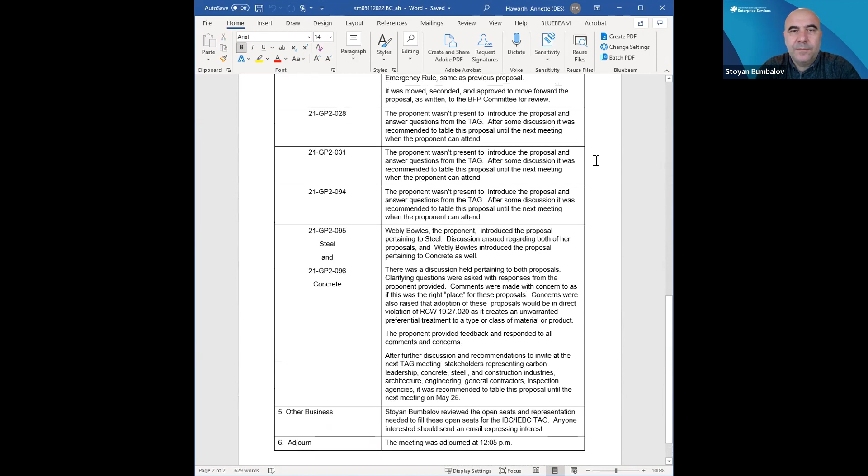I'll make a motion to approve the May 11th meeting minutes. Thank you, Sue. I'll second that. Thank you, Roger.

Okay, any discussion or edits here? All those in favor signify by saying aye. Aye. Aye. Aye. Opposed, nay? Or abstentions? Okay, May 25th meeting minutes approved.

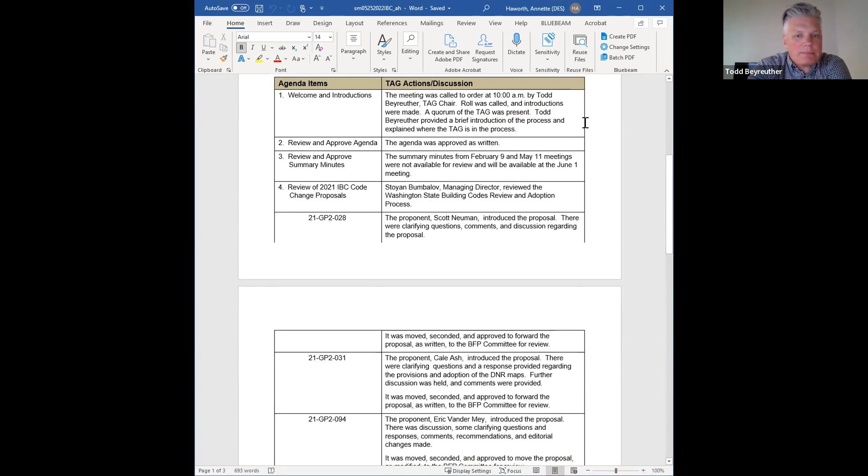I'm sorry, did I get that incorrect? We approved the 25th. Now we're on to the June. Oh, okay, I'm sorry. We approved the 11th, so this is the last one, May 25th. Thank you. Now we're on 25th. Thank you.

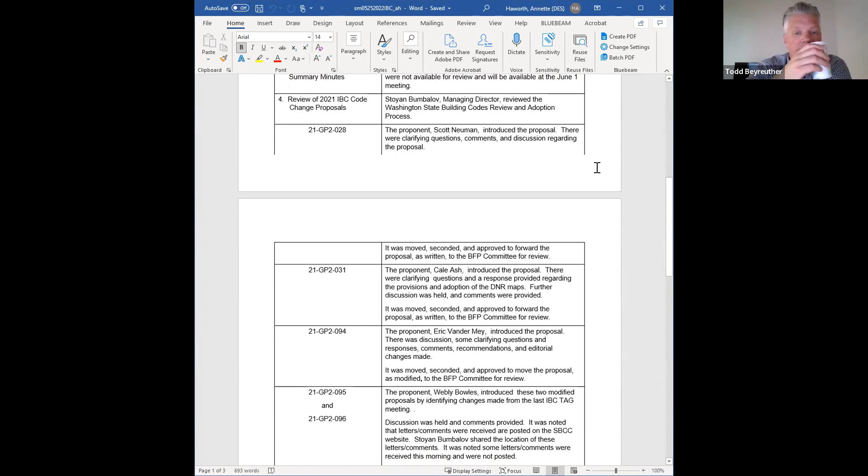Okay, I'll make a motion to approve those minutes. Thank you, Roger. I'll second. Thank you, Sue. Any discussion or edits?

All those in favor signify by saying aye. Oh, I'm sorry, Todd. Go ahead, please. I have a comment on, towards the bottom of the summary minutes there, I'm just trying to understand the impact here.

On the last proposal, it said the motion was made to table further discussion of these two proposals until legal guidance is obtained. I'm just trying to understand what the impact of that is, because I remember, I think Andrea made that motion. I'm not sure if it was seconded, but I'm just trying to understand the impact of that.

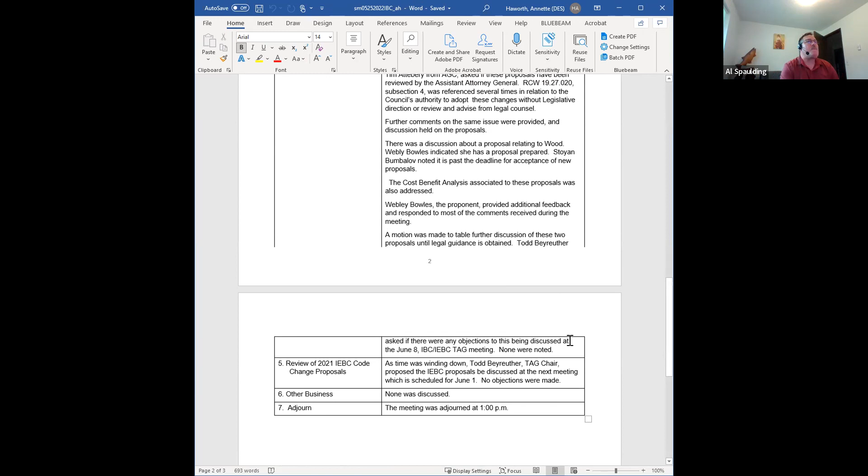I requested our Assistant Attorney General to evaluate the section that Andrea was, well, there were a few comments actually regarding this section, 19.27.020, I think it was.

Sub 4, right. Yes. So I assume we will have a little information for the next time. But again, keep in mind that the advice the Assistant Attorney General can give us, it's not 'go ahead, do it' or 'don't do it.' It's just an opinion that is not based on any case laws or anything. So I will have something for the next time. No further comment. Thank you.

Al, it's a good point. I don't know if you were trying to make a point that that wasn't the only reason we tabled it. Is that correct? Well, yeah, I understand the conversation was continuing, but I'm just wanting to make sure that this note almost infers it was tabled because we were awaiting legal advice potentially, and I don't want the discussion to be held up.

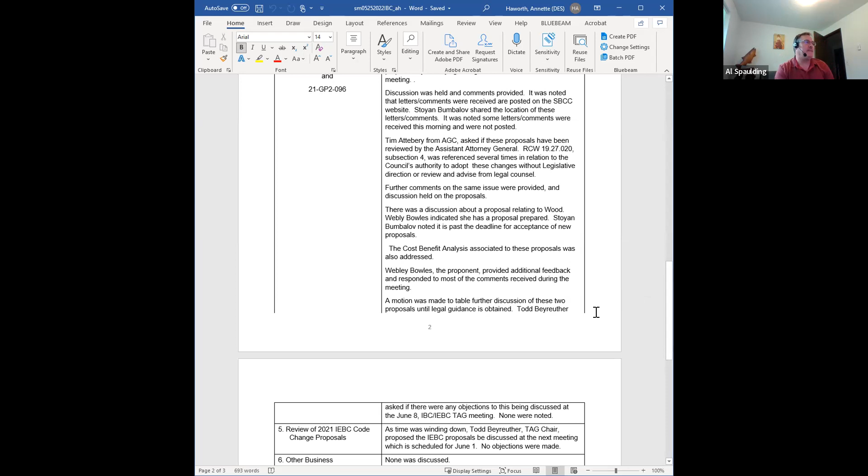Based on whether or not SBCC gets legal advice or not. I don't know that the motion was seconded and approved by the tag to hold it up until legal advice was obtained. So that's what I was trying to point out, that I don't want that summary note to hold up the tag's ability to move forward.

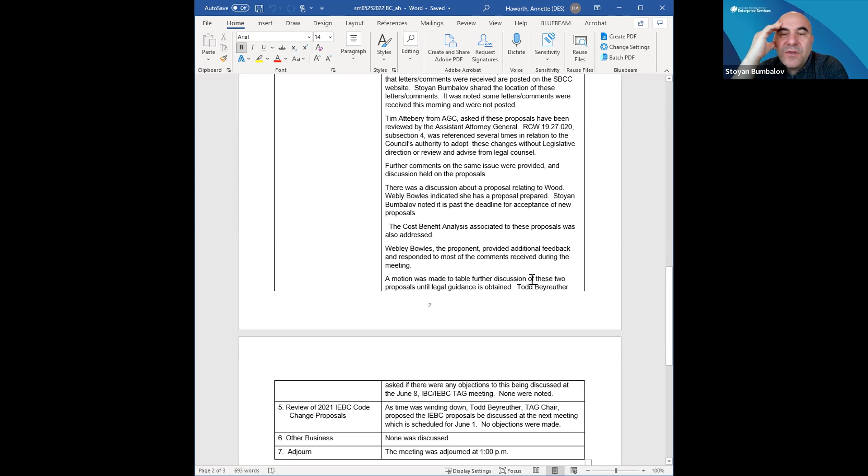Can we modify the minutes to read the motion was made to table further discussion for the meeting, whatever the date was? Yeah, because really in my memory it was just a continuance. There were multiple reasons why we wanted to continue. Yeah, we ran out of time, so we wanted to continue the discussion. I appreciate that, thank you.

Yeah, no, good catch. Sorry, Al, I think I didn't understand the question at the beginning. I cut you off actually, so I apologize for that.

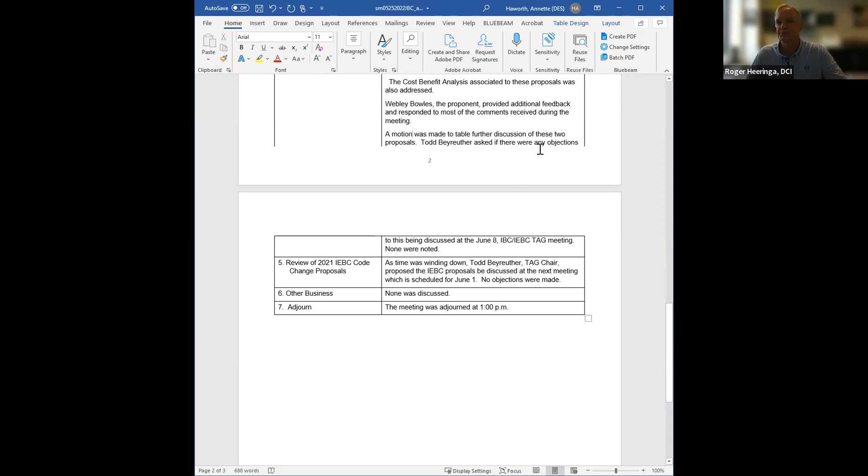So I will amend my motion to approve the minutes as modified. Thank you. And then Sue, did you have the second? I'll second that. Okay, thank you. Now, thank you, Al. Any other further proposed changes?

All those in favor signify by saying aye. Aye. Aye. Aye. Aye. Any opposed, nay? Or abstentions? Okay, thank you. May 25th minutes approved.

That was it, right? So with that, we can move into agenda item 4, which is to actually review the 2021 IEBC code change proposals. As we get into this, my memory is we have how many, Stoyan? Probably 13, 14? We have 1, 2, 3, 4, 5, 6, 7, 8, 9, 10, 11. Okay, 11 proposals. So obviously we're going to use Robert's rules here.

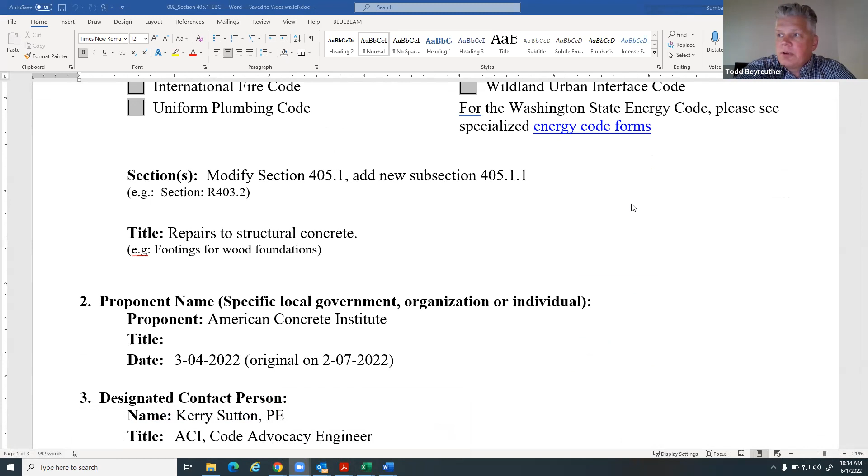This is a workshop, so it's not formal testimony, though often it takes that format. Our goal here is to make sure everyone who wants to speak is heard. We will open each time with the proponent if available and would like to speak to their proposal. With Robert's rules and via Zoom, let's use the raise hand feature, please, and then I will acknowledge you.

Yes, Kerry. No, just testing it out. Oh, there we go. So I am the proponent and the... Oh, okay.

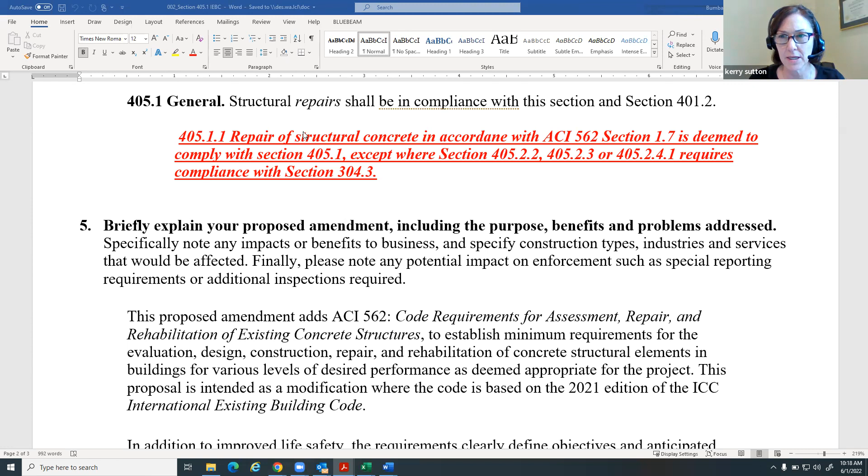What this does here is proposes modification of section 405.1 and adds new section 405.1.1, repairs to structural concrete, stating that repairs of structural concrete in accordance with ACI 562 are deemed to comply with the section. So I know there are a few others that might have a few comments on this. We have a couple of our supporters, Andy Taylor and Keith Kesner, that are online today as well.

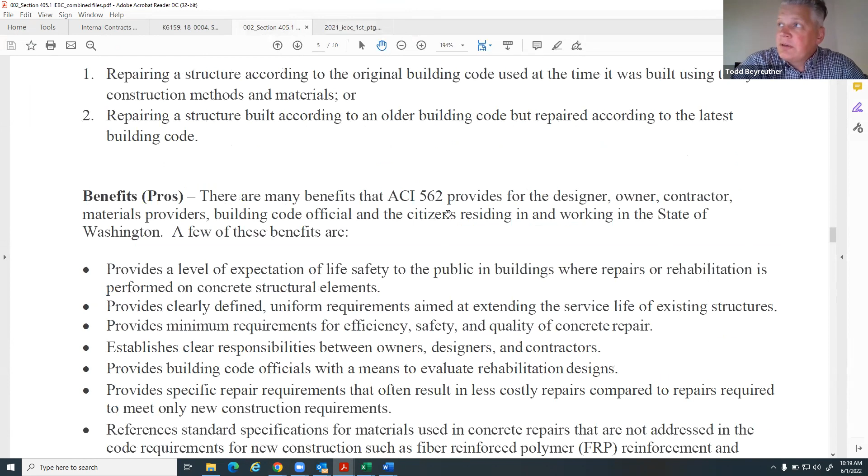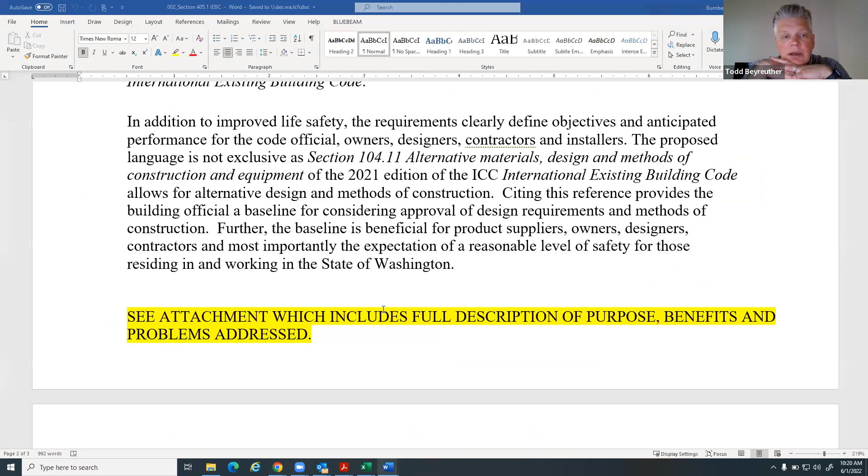Okay, thank you Kerry. And let's move into other proponents or other stakeholders that would like to speak on this. Maybe I should go a little deeper though, since I set all these amendments or proposals up. We do intend to take action today as the Technical Advisory Group. The Technical Advisory Group is a stakeholder group with advisory responsibilities to the council. The first step though is to move it into the BFP, Building, Fire, Plumbing Committee, which is made up of a subset of appointed council members. So typically in these groups, anyone can propose amendments, but we will take a vote on the action as the TAG members. And then typically, we can recommend as proposed, recommend as modified if we make changes, or perhaps not recommend or reject whatever language we want to use.

Okay, with that, would anyone else like to speak to this? Okay, this is John Sue. I got my hand up. John, I'm sorry. Yep, there it is. Welcome, John.

So I was on the structural committee at ICC, and one of the things that did come up was some of the language here, some improvements were suggested, and I sent that to Kerry the other day, yesterday actually, and would like to propose making a couple changes here, and I believe ACI is in support of them, and she's nodding, so thank you, Kerry.

Yes. Yeah, so part of it is there was some real heartburn with the committee and others in Rochester, the ICC hearings, about the 'deemed to comply' language. And there was some question about whether that overrides some other parts of the code and things like that. So what I'm suggesting is a couple things.

One, just editorially, the section needs a title. So I've suggested 'structural concrete repairs' for a title there for the section. I will say that ICC just had 'structural concrete,' I believe, but I thought 'repairs' was more specific here. So yeah, add the title there: structural concrete repairs. Thank you. And then, after the word concrete, repair structural concrete.

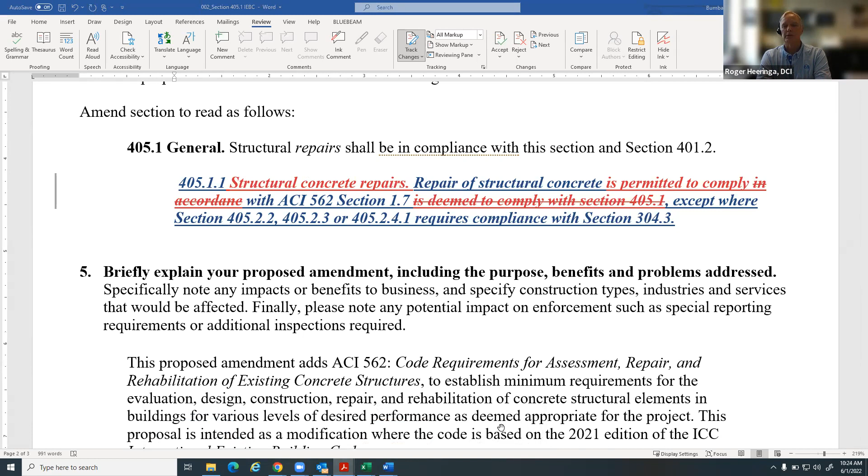But can either one of you inform me or describe what, no, I can't, what the exceptions are? So section 405.2.2, 405.2.3, or 405.2.4.1. Can you explain, I don't have the code here in front of me, can you explain what those exceptions are and why that's part of this?

Here is the 2021, okay. No, I believe it's actually the references. Well, okay, yeah, the idea is to take the seismic out of it. Basically, this does not apply to seismic repairs.

The FEMA ATC Seismic Code Support Committee, I gotta get that right, was very concerned about some of the provisions in here in ACI 562 and felt they were not appropriate for seismic repairs. So essentially, this says if you're doing any seismic repairs, this does not apply.

Okay, thank you. And that is clearly pointed out as well in section 1.7 of ACI 562. Okay, thank you.

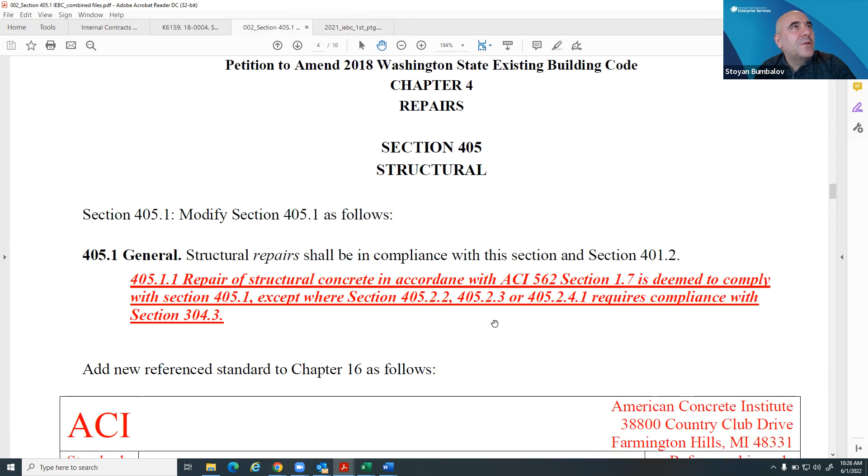Anyone else? And I have a question here. So there was an attachment that was submitted with this proposal. So here is the attachment, which says 2018. So I'm a little confused if this here is part of this proposal or not, because the proposal doesn't have the amendments to Chapter 16 of the Building Code.

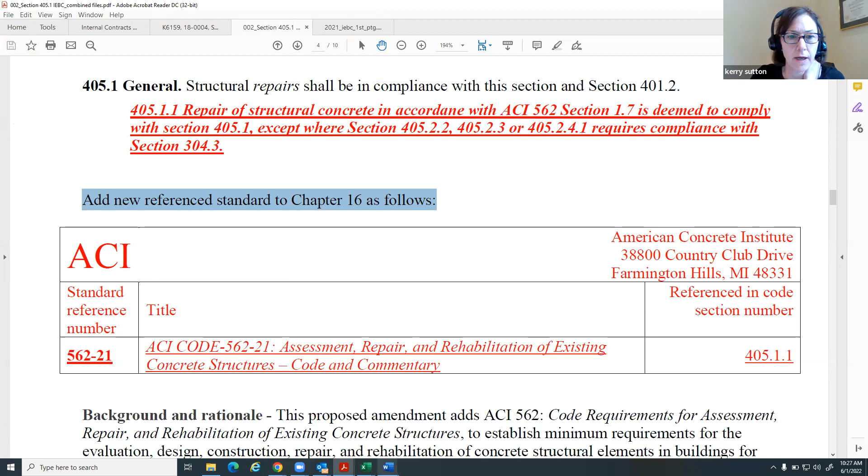Here is the proposal, only section 405.1. And here is the attachment. It has a new reference standard to Chapter 16 as follows. That should be the same. It's just the attachment repeats what was in the proposal or the form and just adds more background. So that should be the same. So the change made here in the proposal should apply now to the attachment.

I get that, but the proposal doesn't have anything related to Chapter 16 and the attachment does. I think you need to transfer that, adding the reference standard to the proposal. I think that's correct. Yes. So take this where it says 'add new reference standard to Chapter 16,' all that plus the table part needs to be included as part of the proposal.

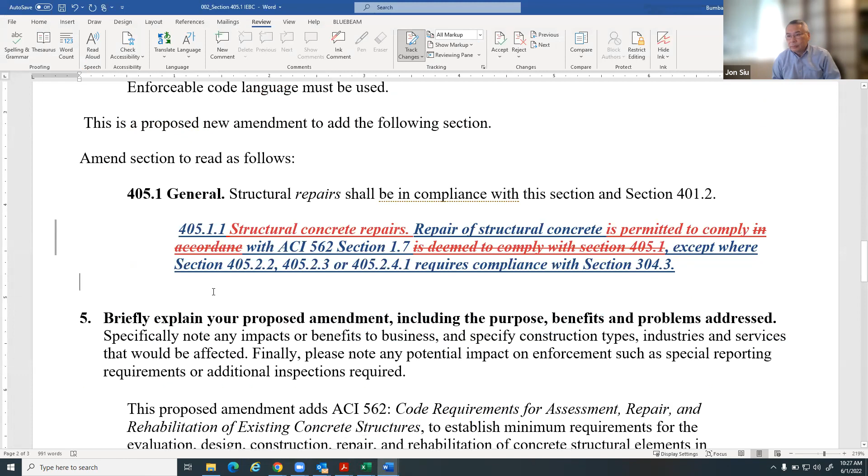Let's concentrate on this, and then I will add it to the Word document.

The second question I have is, what is going to happen if this is approved here for Washington, but disapproved by the ICC during the ICC process?

I think it's okay if Washington adopts it without it being in the model code for next time. We're going to be proposing the same change to the language that we just did here, or a similar change, at Group B for ICC. And again, this code, the standard has been adopted in several other states, so it can stand alone for the individual jurisdiction.

Andrew, please. Hi. Just very briefly, I'm here to speak on behalf of this proposal for two reasons. One is that I'm a practicing structural engineer in Washington State, have been for about 25 years.

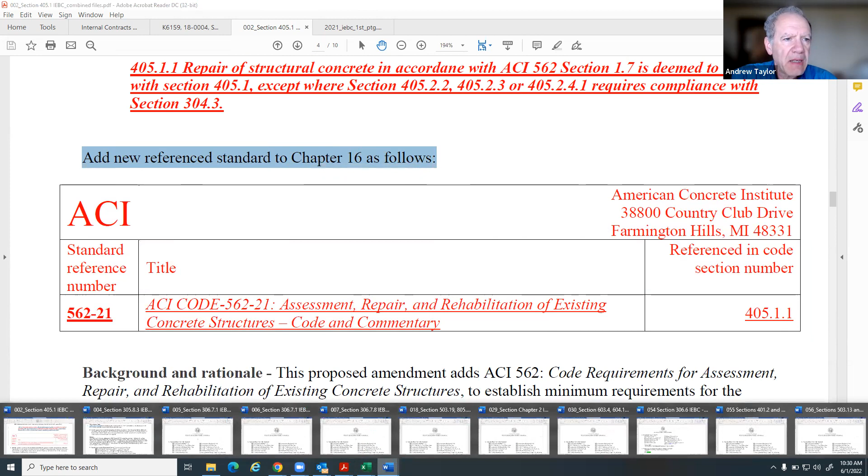I personally depend on ACI 562 for much of the concrete repair work that we design already, and I would be very happy to see it officially adopted by the state. The second reason I am here is that I am also chair of the ACI 318 Building Code Committee. I want to point out that the ACI codes are all developed using the same ANSI approved consensus standard process. ACI 318, which is already used in Washington State, is coordinated with ACI 562. It's also coordinated to the degree it needs to be with ASCE 41, the seismic evaluation and upgrade standard for concrete structures. So in summary, this represents part of an overall system, and I think it would be a real step forward to adopt this in Washington State.

Thank you, Andrew. John, yeah, I just wanted to respond more completely to Stoyan's question. At Group B, I would not expect a lot of opposition. There was only one person who stood up in opposition in Rochester. While they had some fairly substantial concerns, the committee did vote to approve it. So I would not expect that person to be persuasive at Group B should they continue to oppose it, or at the public comment hearing. So I would not expect this to fail. There's a lot of support for it.

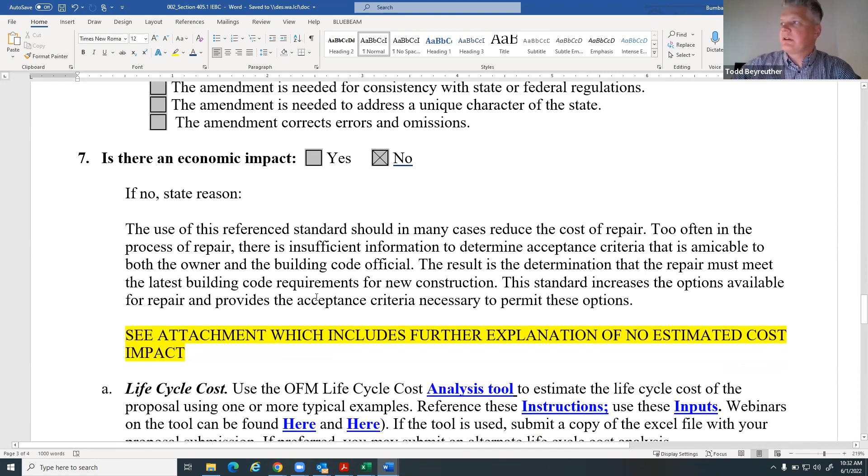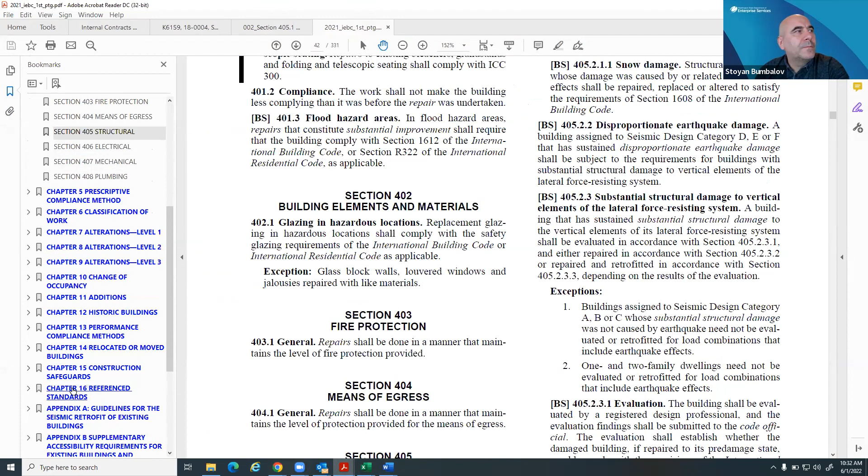I'm still not clear on where the reference standard goes. That's not chapter 16, is it? This is Micah, yes, chapter 16 and the IEBC is reference standards. Oh, I'm sorry, okay, snap my mind out of IBC. Thank you. My mistake, I had the same issue. All right, I'm on page or track now. All right, any other discussion on this then?

Okay, if not, the motion would be to recommend as modified to the BFP committee. Would someone like to make that motion? I'll make the motion to approve that and send it on to the BFP. Thank you, Roger, as modified. As modified, yes, thank you. Yeah, I'll second that. Who is that, please? Tom. Thank you, Tom. Okay, any further deliberation on this?

Okay, let's do a voice vote. All those in favor signify by saying aye. Aye. Aye. Any opposed, nay? Any abstentions? Okay, thank you all.

Okay, second proposal, please. Lee Krantz. This is Richard Williams filling in for Lee Krantz. Welcome, go ahead please.

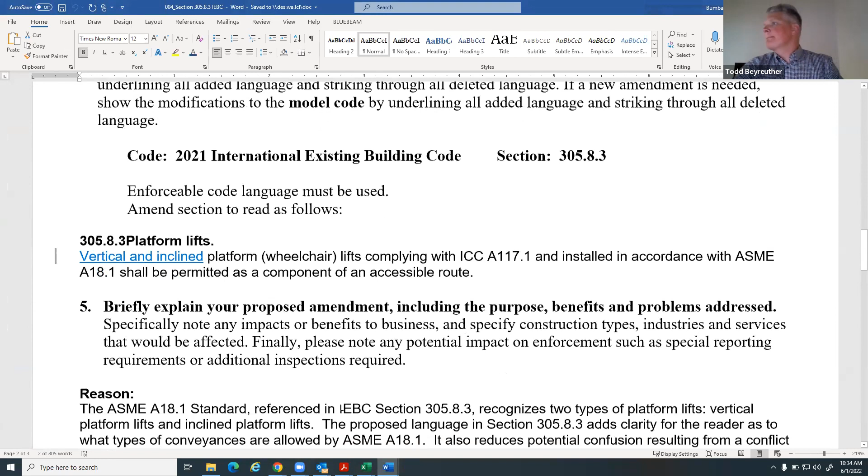Okay, so this code section states that platform wheelchair lifts may be used as a component of an accessible route, but it does not indicate what types of lifts are allowed. This section refers to ASME standard A18.1, which allows two different types of lifts, vertical and inclined. So this proposal simply identifies that both vertical and inclined types of platform lifts are permitted to be installed in existing buildings as long as they're in accordance with the standard. And this was already tentatively approved at the national level, by a unanimous vote.

I think there's an editorial change to be made in this. Looks like the code section is the 2018 section 305.8.3, should be, I believe, 306.7.8. That's what I had. Say again, the section number? I believe the 2021 section number is 306.7.8.

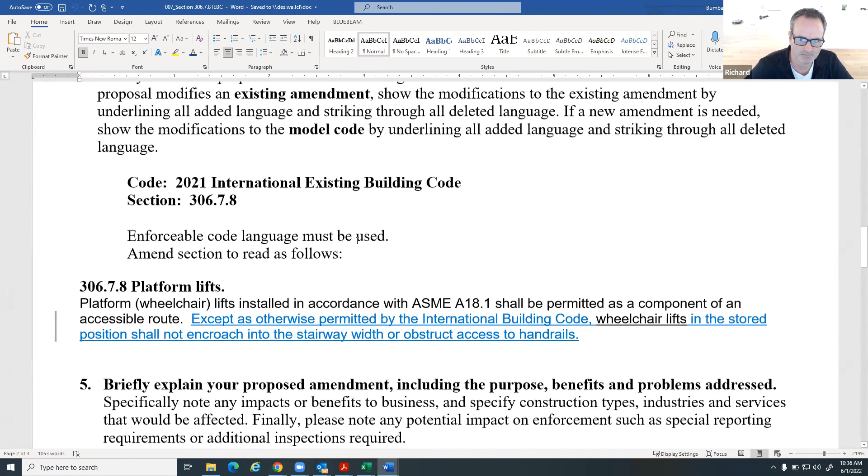This is Roger, I just want to point out that proposal number 007 is also titled platform lifts, and it refers to 306.7.8. So one of my questions will be, what are the differences between these two? Yeah, that's, and I can talk about that. I'll probably, well, I'll talk about that when we get to it, but there are differences. We broke them out because the purpose of this was just to clarify the language that talks about the fact that there are two types allowed.

Richard, this is a working session, so if you think it's helpful to introduce that one now, unless anyone's opposed, feel free. Sure, yeah, thanks. Well, I'd actually like to withdraw that proposal because it was disapproved at the national level, and we feel there are enough issues with it. That proposal talks about the placement of the incline lift on a stairway, and it was deemed, we kind of struggled with this one, to be honest, as a group, and we feel it's better to withdraw it at this point at the state level.

Okay, should we just take that action right now? Well, just a minute, which proposal? I just want to make sure we get the right one withdrawn. Yeah, and just for everyone's, we haven't made a motion yet, so that's why I'm taking the, yeah, so I didn't want to confuse anything, but my understanding is that 21-GP2-007 is the one that we're proposing to withdraw. Is everyone clear on that and okay with it?

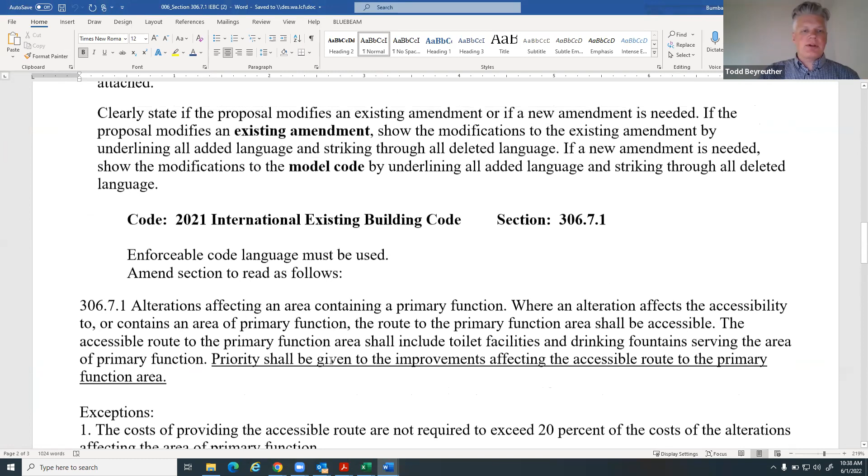Yeah, because there is another one that we have on 306.7.1, which is 006. And that might be the one that is being asked about here. Yeah, that's actually, John, to your point, of the four that I'm about to present, they kind of double up on the code sections. So two proposals deal with one, two with the other, so it is a little confusing. I'm not trying to create confusion in our process here, but if it's helpful to introduce multiple, so we understand the context, feel free, but I'll leave it to others more knowledgeable in these areas.

I mean, 005 and 006 deal with two different issues. Yeah, so that's why we submitted them separately. If we want to talk about them together, I think they are independent of each other. So you're recommending we go back to 004 and isolate that? Because similarly, in the case of 004 and 007, where they both deal with the same code section, they are attacking different parts of that section. 004 is clarification, and 007 was a modification to the text. Both modifications to the text, but you understand what I'm saying, it's actually an actual code change as opposed to more of a clarification.

Yeah, okay, so thank you. Let's go back to 004 then, please. Any other proposed amendments on this before we go into a motion and our discussion? We don't need to go into a motion to deliberate in this format. Well, we need a motion for 004. I'm sorry, I was just clarifying that we can discuss proposed amendments before we make a motion.

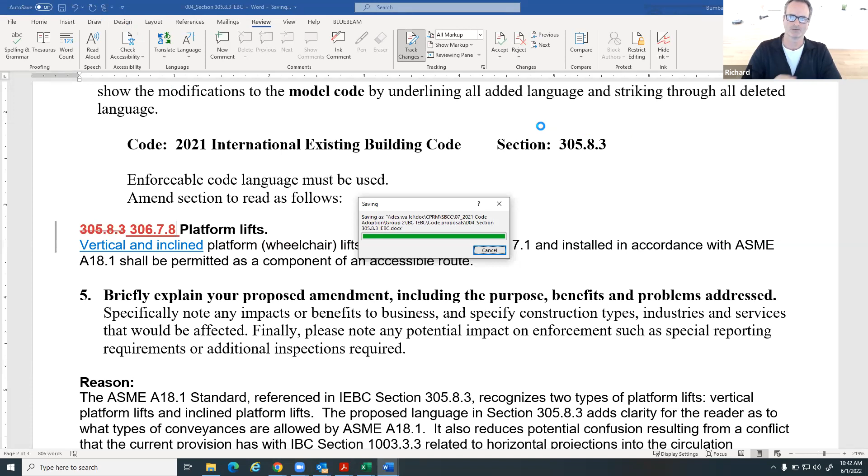When alterations to an area of primary function are proposed, we go to IEBC section 306.7.1, which says where an alteration affects the accessibility to or contains an area of primary function, the route to the area of primary function shall be accessible. The intent of this sentence is clear, but the next sentence is not clear, in my opinion, because it says that the accessible route to the primary function area shall include toilet facilities and drinking fountains serving the area of primary function. I've always read this to mean that only the accessible route to the toilet facilities and drinking fountains is required to be accessible. However, many interpret that differently. The IEBC commentary states that the toilet facilities and drinking fountains must be upgraded to full accessibility.

And the ADA community also understands this to be the case by and large. So we wrote this proposal to put the requirements in the code language rather than rely on the commentary. This proposal makes it clear that the intent of this provision is to improve toilet facilities and drinking fountains to be accessible and to provide an accessible route of travel to them from an area of primary function. So that, in a nutshell, is what it was. This was also approved at the national level by a vote of 14 to 0.

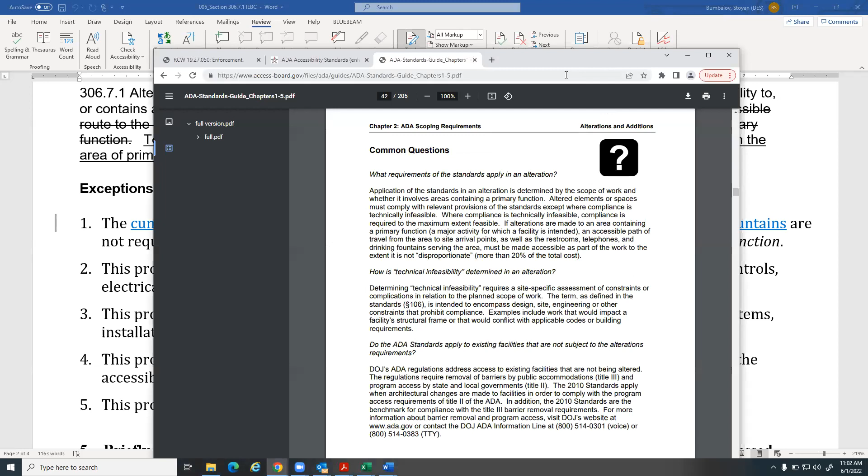So, in the ADA standards itself, it specifically says alterations made to provide an accessible path of travel to the altered area will be deemed disproportionate to the overall alteration when the cost exceeds 20% of the cost of the alteration to the primary function area. That's the language that drives that 20% disproportionality figure. And in doing so, it focuses on essentially trying to get a non-conforming building closer to conformance within that 20% spending, with the first part focused on access to the building or to the area of primary function, and then secondarily for restrooms, etc.

Okay, thank you, Michael. Micah.

Thanks for all the comments. I do hope everyone supports this change. We did submit this at the national level, where we got feedback that this is consistent with the way the federal language is and should apply, and the intent. The national level committee did vote this unanimously to approve it, so we do hope you support it today as well. It is a clarification, and it will function better for the code officials and of course for the applicant on exception number 1. So please support.

Thanks. Thank you, Micah. Okay, with that, unless there are other comments, can we hear a motion to approve as proposed, I believe?

This is Al, I'd make a motion to approve as presented. Second. Okay, was that Al and then Michael? Is that what I heard? Yes, yes. Thank you. Okay, I need just a deliberation. If not, all those in favor signify by saying aye. Aye. Aye. Any opposed, nay? Any abstentions? Okay, approved as submitted.

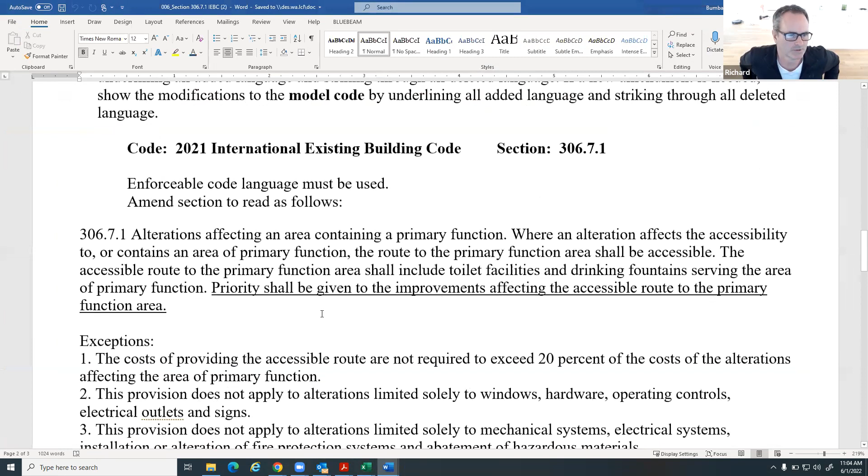Thank you. Moving on to 006, please. This is Richard Williams once again, filling in for Lee Krantz once again. And Mike Barth actually provided a really good segue for this proposal.

For projects that involve an alteration affecting an area containing a primary function, it's often difficult to decide which of the accessibility improvements should be included in the scope of the project. And we wrote this with the idea that if the improvements to the accessible route to the area of primary function are within the 20% of the construction budget, then those are more important than improving other items like the restrooms and the drinking fountains. Again, I think that's consistent with what Mike was pulling from the ADA.

Without an accessible route, people with disabilities aren't able to participate in the activities in that area of primary function. So this code change just provides guidance for designers and building officials to say that priority shall be given to the improvements affecting the accessible route to the primary function area. And I think it's important to note if the cost to improve the accessible route exceeds 20% of the budget, say like an elevator, then other improvements such as restrooms and drinking fountains would still apply.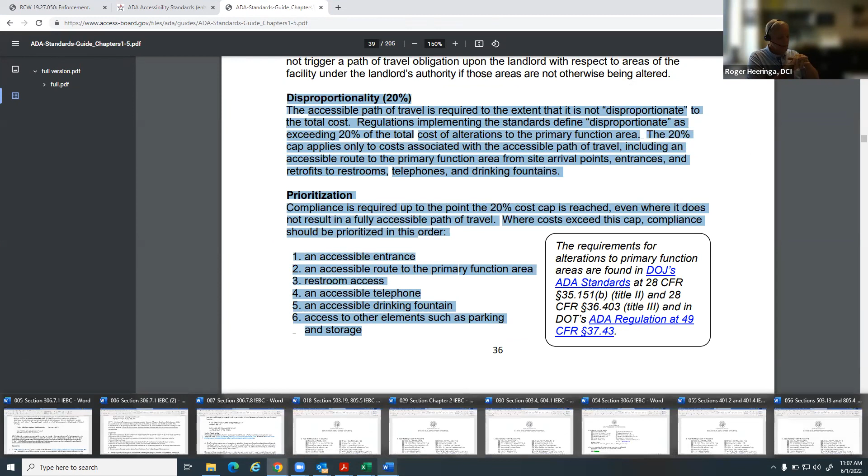Sorry, mute button issue. I guess there are people much more who understand exact code language better than I, but I'm wondering if 'priority' is too vague, or are we trying to tell people to do one piece rather than the other? I guess I'm wondering, is priority enforceable? There are building officials here—when there's code language that says priority, is that an enforceable term?

Yes, in a word. Former building official, sorry, but I would agree. I would say yes, we can have that as the priority. And I will say, essentially, this is how Seattle was approaching it anyway. Okay.

It's just a nod to the fact that there is no real priority indicated in there now. We're trying to provide some clarity as to the direction to take on this.

Yeah, and the idea is not to—it is somewhat vague so that there is some flexibility there. You don't want to say you have to do it in this particular order because sometimes there are reasons for doing other things. But what we didn't want to do was say, okay, instead of the high pile carpet that's there now, I'm going to put a hardwood floor down, and that makes accessibility better for wheelchairs because it's easier to roll on. So I'm going to count that toward my 20%. To me, that's not the same thing as putting in a ramp or an elevator or something else that actually gets people into the building or lets them really have access to the primary function.

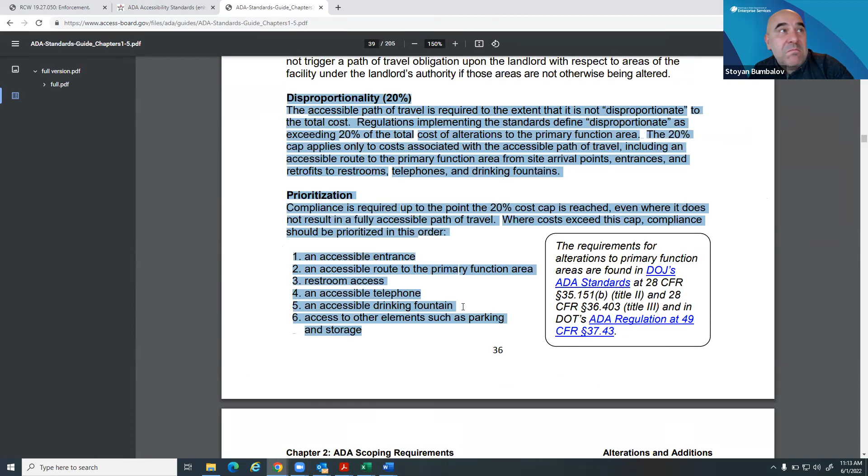Yeah, sure. So this is when you start prioritizing. You may have a person that will say, okay, I will install a drinking fountain. That's okay, but it's more important to provide the accessible entrance and the accessible route, because you may not be able to get to the drinking fountain.

It's related to the 20%. Yeah, but I think it also works the other way—even if you're going to do more, I think you should still be looking at the major improvements rather than the little picky ones. So I don't know, again, I don't know if it'll make a difference in how it's enforced.

Bill, do you have a related comment? Yeah, I actually got a question. That list of six items of priority that you showed, I'm not familiar with that. Do you have to follow that order—for instance, before you can install a drinking fountain, do you have to comply with all of the other items above it first?

What I showed on the screen, this prioritization was from the Department of Justice, coming from the 2010 ADA standards. IBC is intended to be consistent with the 2010 ADA standards, but unfortunately there are some differences. So this prioritization is coming from the 2010 ADA standards, and it's a good idea if the Washington state requirements align with that.

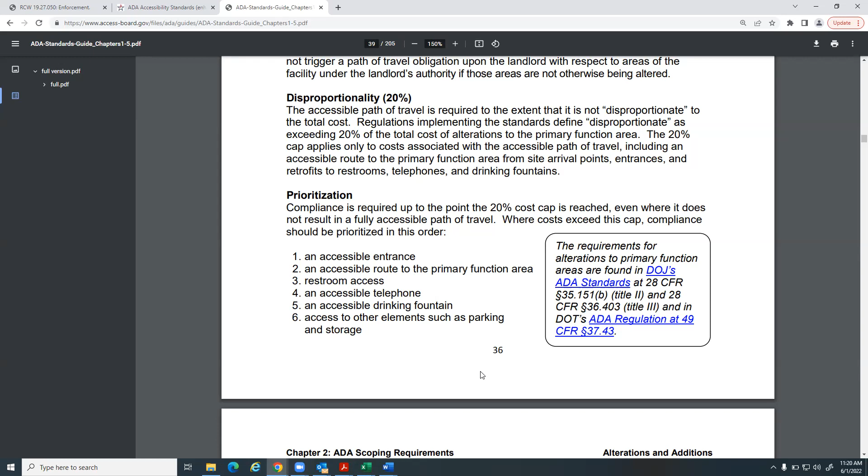Thank you, Peter. Yeah, just responding to that exact point. No, this is not under our control. It's not in the building code. ADAG is under control of the feds.

And yeah, I understand, I wasn't trying to diminish the importance of being able to navigate across floors and things like that. Just saying that we did want to get people to the primary functions as being more important than just fixing your rolling resistance. But yeah, there's lots of improvements that could be made, and also, those are again beyond the scope usually of a building.

You can replace your carpets and flooring and things like that without a permit. So that's not going to be something we're going to be regularly enforcing, or enforcing at all, probably.

Okay, thanks. I think this is a good reason to keep the sentence fairly benign by just saying priority shall be given, yada yada, instead of including the entire list, because I think we can all assume that list is likely going to change. The ADA is likely going to change that. And this way there's no conflict.

Thank you, Rich. Yeah, I agree with that. I think that was our intent, was to provide flexibility by keeping it open-ended. And I was just wanting to say that in what Stoyan and Mike had talked about with kind of linking our comment about the priority to the 20%,

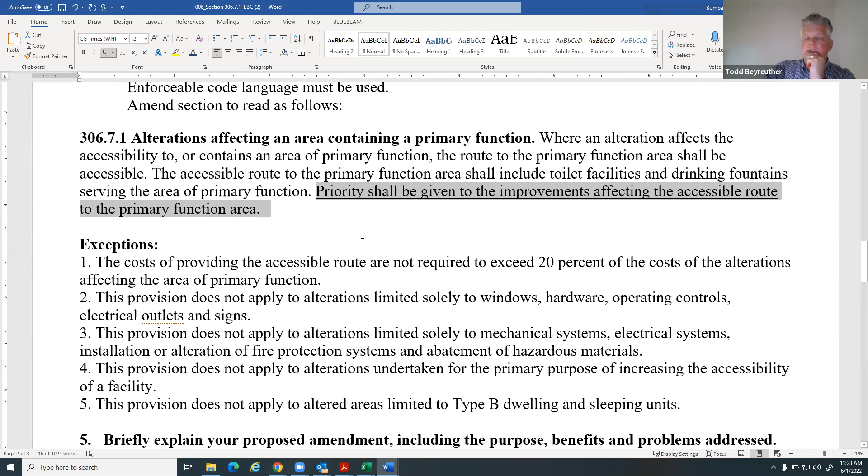Okay, thank you. With that, is there any other comment, or can we entertain a motion to approve as presented? This is Mike, I'll make a motion to approve as submitted. Thank you. This is Roger, I'll second that. Thank you, Roger. Any other deliberation?

All those in favor signify by saying aye. Aye. Any opposed, nay? Any abstentions? Okay, so approved. Thank you, everyone. Okay, moving into 018, please.

So 7 was withdrawn, so we'll skip 7. And the next one is 18. Sue? I can, I'll talk about this.

So this is similar to an amendment that the City of Tacoma has used for quite some time in their IEBC. So it's really for an additional requirement for buildings. Sorry, I'm gonna put my headphones on, I've got a lot of noise here.

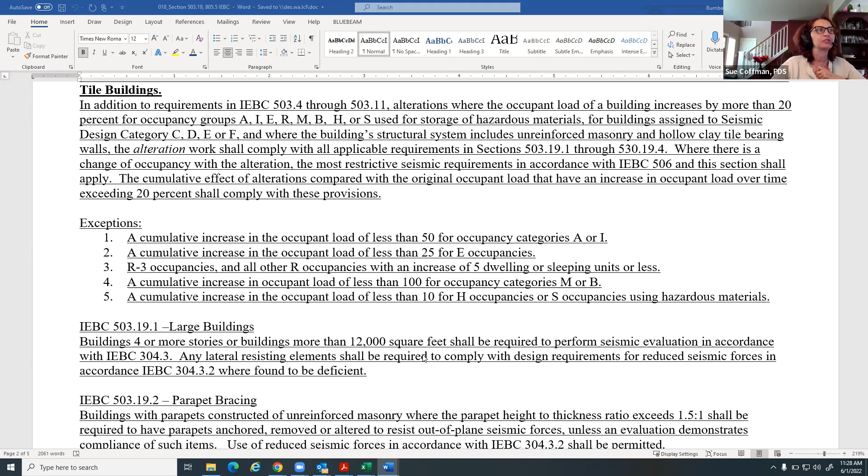IEBC 503.19.1 is for large buildings, for buildings 4 or more stories or buildings more than 12,000 square feet. They need to perform seismic evaluation in accordance with IEBC 304.3. Any lateral resisting elements shall be required to comply with design requirements for reduced seismic forces in accordance with IEBC 304.3.2 where found to be deficient.

The next section, 19.2, is for parapet bracing. Buildings with parapets constructed of unreinforced masonry where the parapet height to thickness ratio exceeds 1.5 to 1 shall be required to have parapets anchored, removed, or altered to resist out of plane seismic forces, unless an evaluation demonstrates compliance of such items. Use of reduced seismic forces in accordance with IEBC 304.3.2 shall be permitted.

Floor and roof wall anchors. The alteration work shall include the installation of wall anchors at the floor and roof lines unless an evaluation determines compliance with existing wall anchorage. And this again allows use of reduced seismic forces.

Bracing of partitions and non-structural walls: unreinforced masonry partitions and non-structural walls within the work area and adjacent to egress paths from the alteration area shall be anchored, removed, or altered to resist out of plane seismic forces. And use of reduced seismic forces in accordance with IEBC 304.3.2 is permitted.

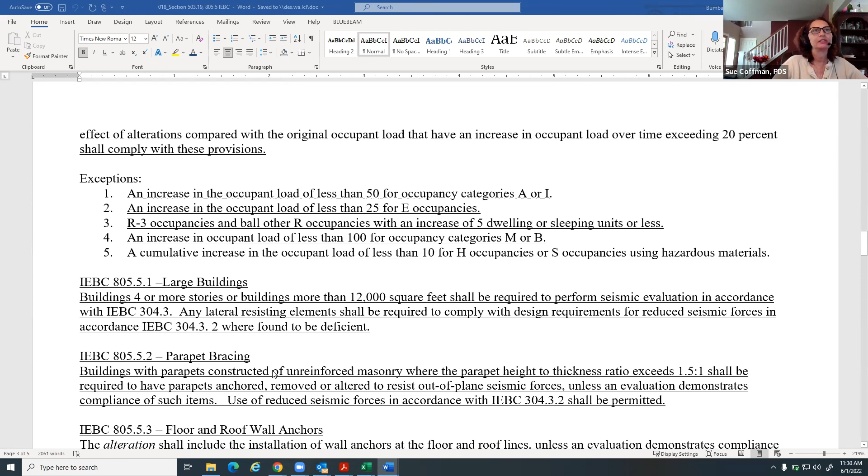IEBC 805.5 is similar to the amendment we just went over, very similar in fact. This is just a different section, for level 2 alterations. It's exactly the same requirements that I just went over for the prescriptive section in the IEBC, so we can just fast forward through since this is exactly the same proposal. Another comment: there is not a requirement for this same section in level 3 alterations, because anything in level 3 is also required to comply with level 2 alteration requirements. So this is the exact same language, just repeated in the level 2 alterations section.

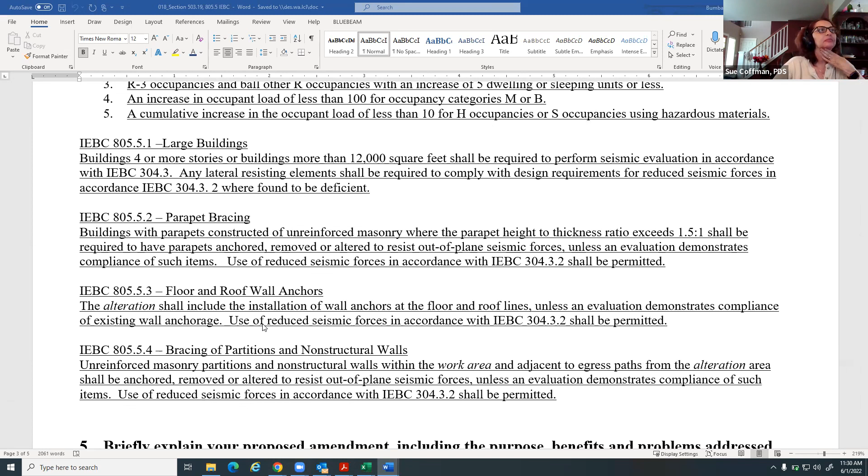And this is important for resiliency of our buildings in Washington, especially these older non-compliant buildings that are unreinforced masonry. It is important to require over time for these buildings to get upgraded. That's important for our seismic resiliency within the state. So I'd be happy to answer any questions.

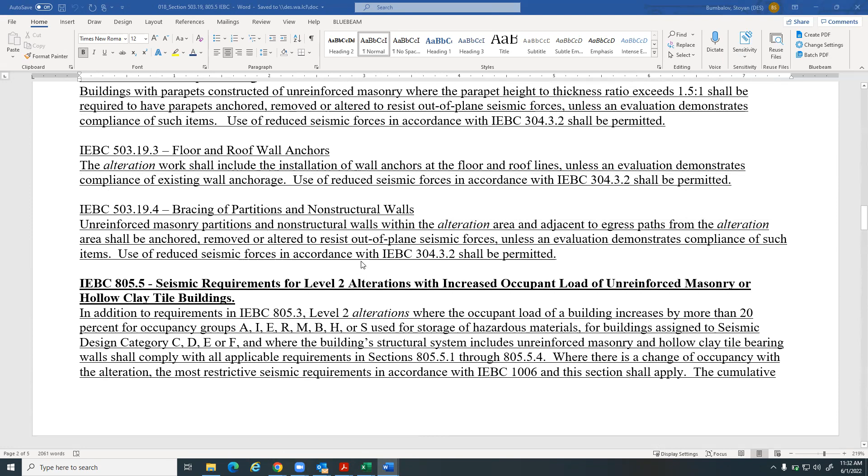Thank you, Sue. Go ahead, Mark. Just to note, I picked up on exception number 3 - it says 'ball' instead of 'all.' Oh, R-3 occupancy, some ball other. Oh, whoops, okay, yeah, that's a typo. Just thought I'd point that out. Thank you, yeah, you're right, take off the B on that. Which one? You're just there, Stoyan. Go back, there you go. Exception 3, ball to all - it should be all, not ball.

The other thing is, doesn't this parapet bracing show up under the alterations and re-roofing section? It does, but this type - there may be situations where they're not touching the roof, but they are doing an alteration for this URM building, and it may be a large alteration that increases the occupant load. Our main concern is where you're adding more people to one of these buildings, because that's our real danger - people. So we want to make sure that any type of improvement where you're significantly increasing the occupant load, you're going to take a look at seismic. Even if you're not touching the roof, even if they're not touching the exterior, if you're adding a lot of people to a building, we want you to look at the seismic.

And does that also coordinate with the change of use? I mean, because basically that would be when you're usually getting more people, change of occupancy. Yeah, so it does coordinate somewhat. Originally the proposal included the change of occupancy section, alterations to that, but we decided to scale that back and just look at our real focus, which was increased occupant load. You may change the use, but our real concern is when you're increasing occupant load, you're adding more people. So we just wanted to focus specifically on adding occupant load.

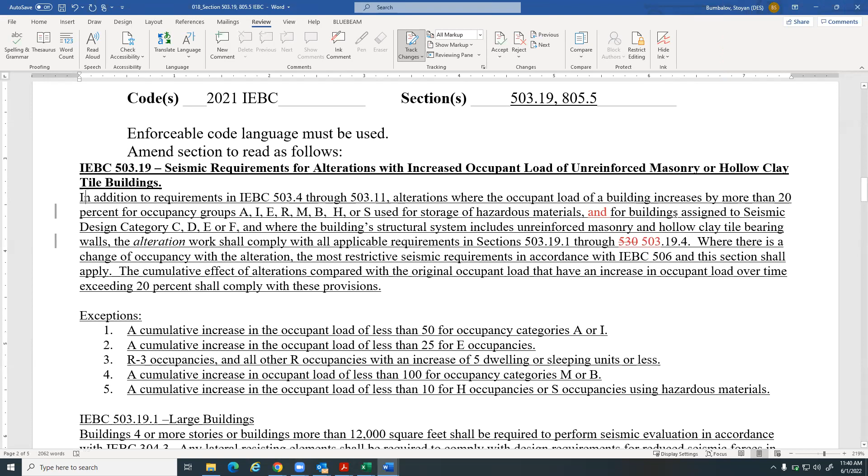Okay, or no, John, is that not recommended? Is that we give direction and send it to the BFP for - alterations meeting the following condition, all of the following conditions. Yeah, we can give it a shot, but I get a little nervous about writing this much on the fly. But that's okay, let's give it a shot. If we have to, we can table this and give a chance for it to review, and next week we'll take it up right away. Well, let's just maybe try it. I don't think it's that much, we have the brain trust here. Alterations meeting all of the following conditions.

We'll have a couple more opportunities to fix it. Yeah, if we need to. And then, bullet one.

You take out where, I think, then. When the occupant load, I don't think you need either. Okay, just say the occupant load, capital T, the occupant load.

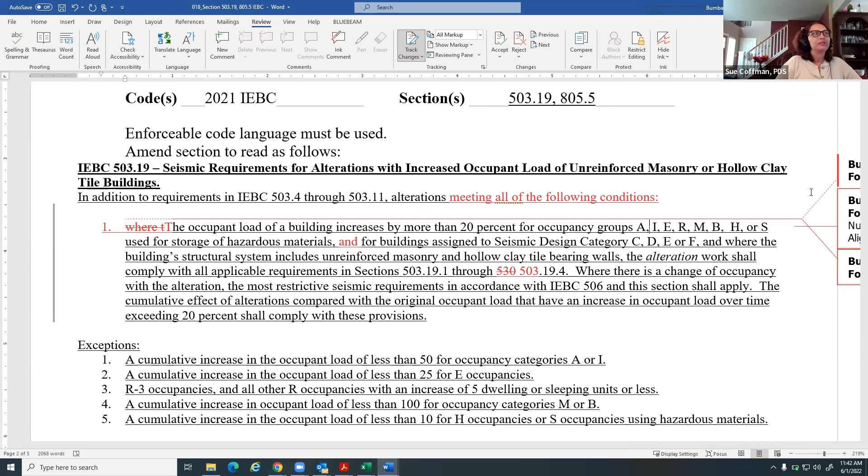And then go all the way to the comma, number 2. Yep, and then just capital B, buildings assigned.

Then the next one gets split too, yeah. And then after the F, period. And then capital T, the building's structural system.

After bearing walls, period. And then period after bearing walls, and then go back to the main paragraph for the next. Yeah, I think that part of the sentence needs to be translated up into the charging, the first, yeah.

Right, the alteration shall be required, with, yeah. And then the last two sentences can just go back to the paragraph.

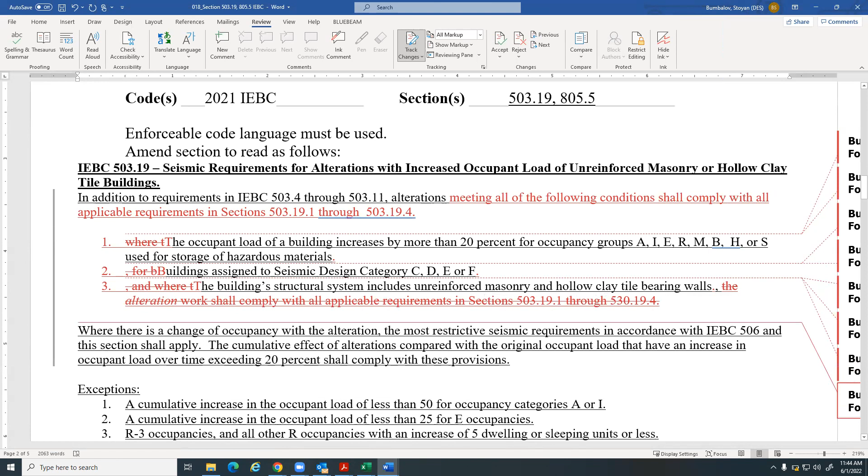Like that? Yes, okay. And then that same formatting gets repeated in section 805.

Okay, maybe before we do that, Bill, do you have a comment on that? Yeah, just real quick, not to sound like a grammar snob, but on line 2, you should add a comma between E and F. Yep, it's known as an Oxford comma, and in some precedents it does make a difference legally. Yep, and it's consistent with what you did in line 1.

Thank you, Bill. Everyone reread that first sentence. Is that what you intend? Yes.

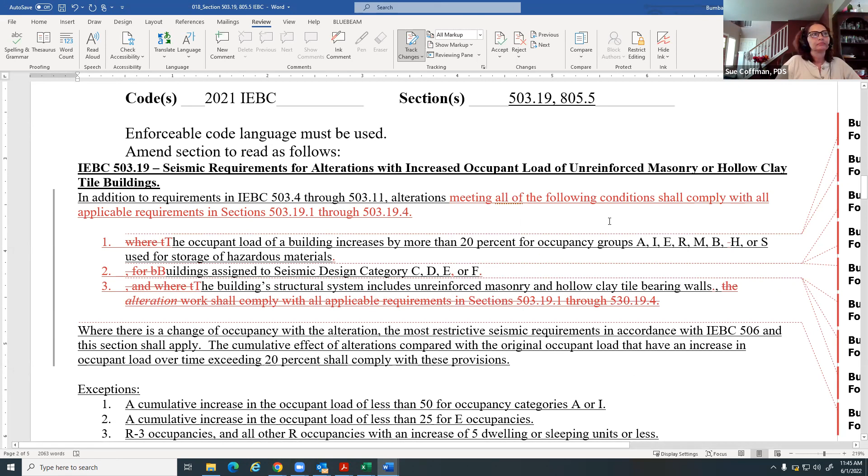Okay, and you said you need to have the same right here? Yeah, basically break that next paragraph into the same bullet list, except you would comply with sections 805.5.1 through 805.5.4. So those section references are slightly different.

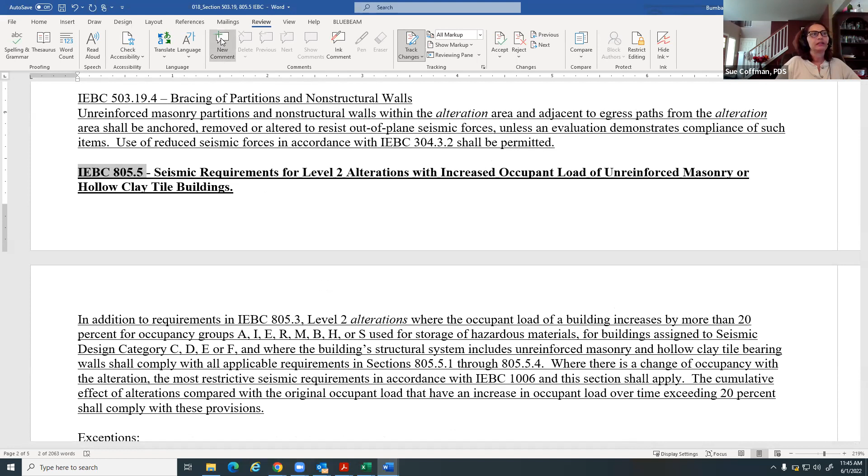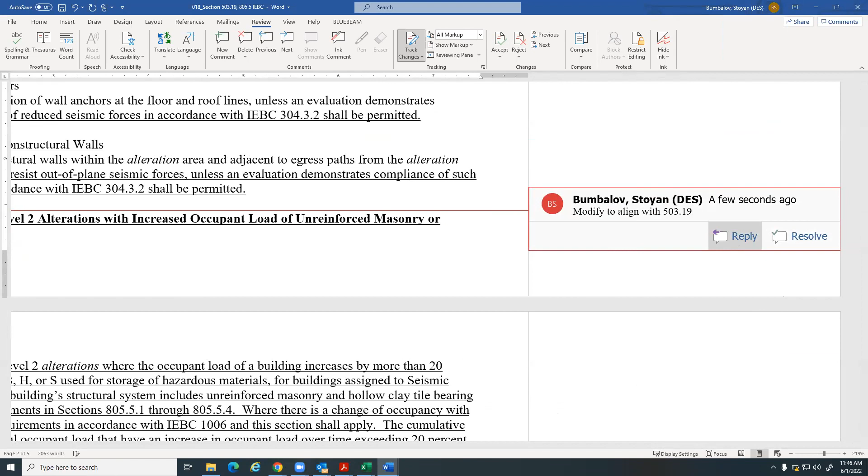Yeah, 503.19. Yep. Okay. Sorry, I should have listened. Okay. That's it? Okay.

Anything else? Everyone okay with that? And I should exempt myself from voting since I was the proponent. If you like, is that necessary? Anyone want to comment? But I'm not sure, but okay.

I'm willing to. Okay. We've had tag members in the past that were proponents for proposals, and they were allowed to make a motion on their own proposal. Thank you, Alan. Yeah, I think okay. I think it's acceptable as a recommendation at advisory level.

Okay, thank you, Sue. Okay, can we hear a motion then to approve as modified to the BFP committee? I'll make a motion that we approve this as modified. Thank you, Roger. This is Al, I'd second. Thank you, Al. Any further deliberation?

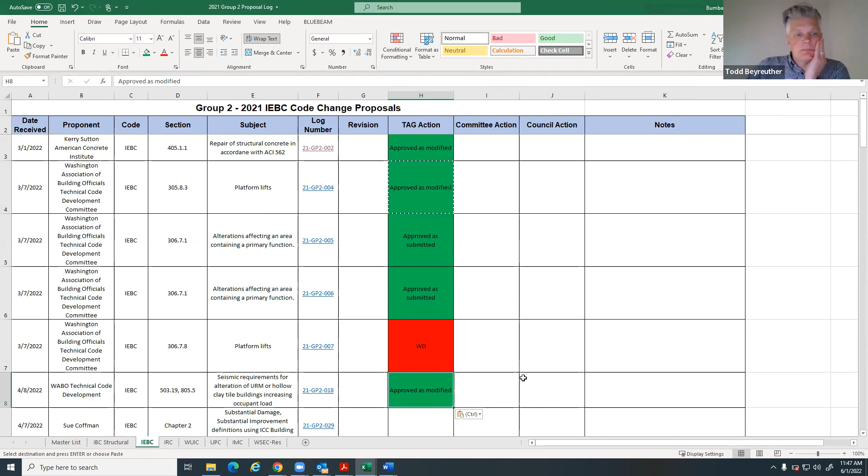All those in favor signify by saying aye. Aye. Aye. Any opposed, nay? Any abstentions? Thank you, thank you, Sue.

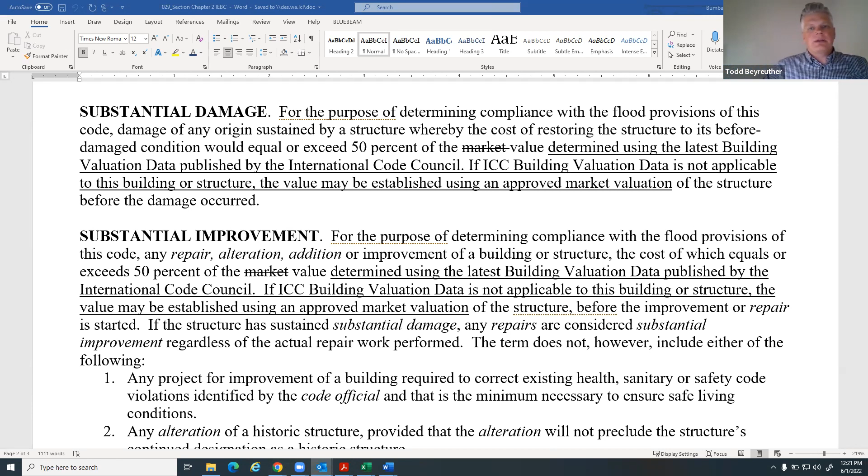Okay, thank you, Michael. If there's no other deliberation, it's been moved and seconded to forward this as presented, as submitted, to the BFP committee. If we're ready, all those in favor signify by saying aye. Aye, aye, aye, aye. Any opposed, nay? Any abstentions? Okay, so approved. Thank you, Sue.

And we'll move on to the next one, 030, with Sue, please. Okay.

So this is somewhat similar, only City of Tacoma expanded it to just be any level 3 alterations. So a level 2 alteration is below the level threshold of level 3, and what we say for level 3 alterations is the work meets or exceeds the threshold of either substantial improvement or substantial damage. So we allow the ICC building valuation data to be used to define what a level 3 alteration is, not just flood provisions. This is another technique to be able to quickly establish whether you have a level 3 alteration.

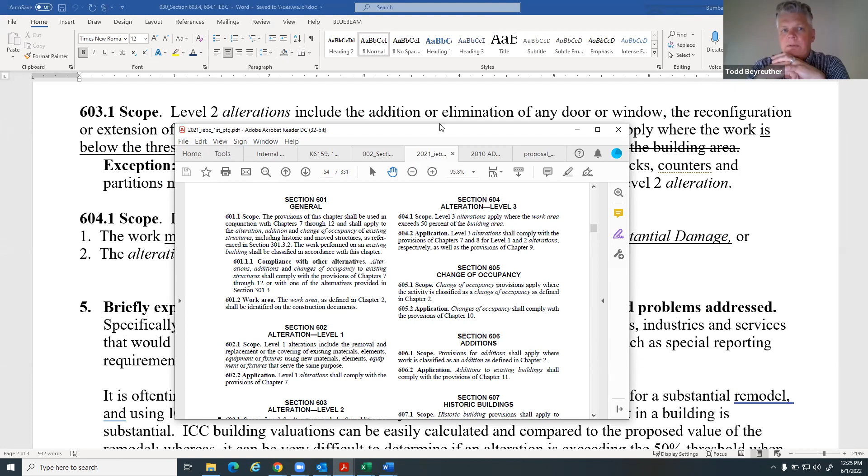Okay, if there's no discussion, can we entertain a motion? I would like to motion for us to move this on to the BFP for consideration. Okay, thank you. Is there a second? This is Bill, I'll second. Thank you, Bill. Okay, now any further deliberation?

I have a clarifying question. Is it approved as modified or approved as submitted? Oh, well, I think my motion should be approved as modified, as Todd suggested. I see, because I've asked for that. Stoyan, is that clear what I'm asking? To align with 2021. Yeah, just to make sure that the proposed changes actually reflect.

Yeah, the format, something's askew with the... Michael, you're very soft. Sorry, yeah, I was just, I would agree with approved as modified because there's something amiss in the format there based on the code language. I think the substance is certainly agreeable, we just need to fix the form.

Yeah, thank you. Just fix the strikeouts and the underlined text. No changes to it though. But yes, that's a modification to the proposal. So yes.

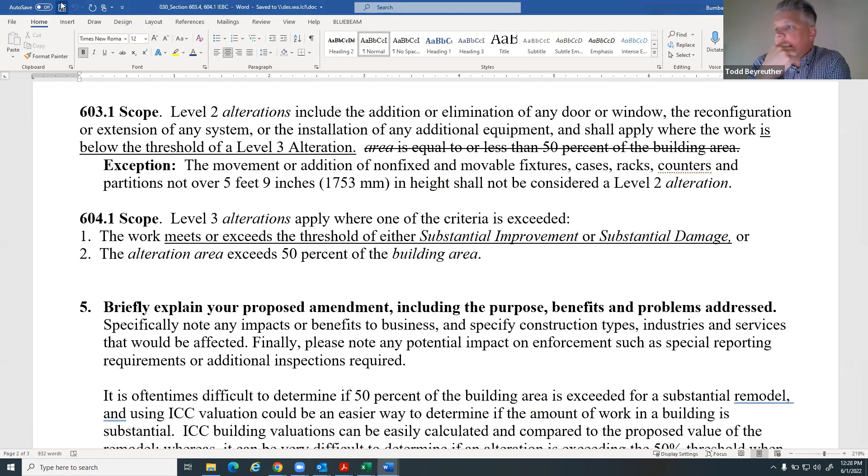We completed, do you want to come back to 054, Micah, or do you want to skip over it? We're ready. We emailed some stuff to Stoyan real fast, and we're gonna start over. So ignore. Stoyan, are you ready? You're good. Yes, we're good.

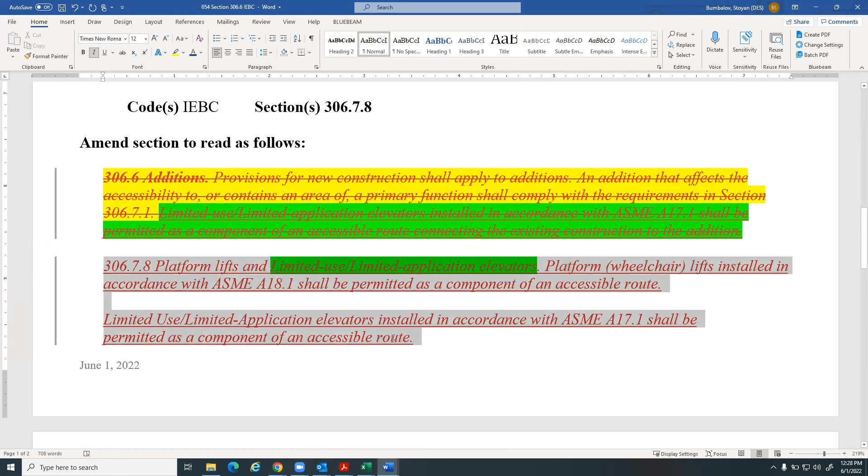So this one goes away, and we are replacing it with that. I think Micah's saying he emailed more. Oh, yeah, we emailed you something else. We don't want to do it that way necessarily. We want to have it in both. So, like I said, let's just start over. Ignore my testimony and kind of ignore the reason statement.

We really need to revise the reason statement before the BFP committee. Our intent is that limited use, limited application lifts will be able to be used pretty much anywhere you use a platform lift - additions and everything else. So we do want to amend section 306.6 and section 306.7.8 that says you shall be able to use these, or you can use these. So let's simplify that. We can show that on the screen if need be.

So you just need to take the second half you've got there, Stoyan, and add a 306.6 section as well, or an addition, to the additions, because we do want to have it wherever you're allowed to use those. And John's going to help me jump in here too, I think. Yeah, I think undelete what you deleted in 306.6 above there. Right, so undelete all of that. So we want it in both places for additions and alterations, and that's what this would do.

So what is shown on the screen now would be correct, aside from the 306.7.8. We don't need the entire portion underlined, just the limited use application elevator change to the title, and then the limited use limited application elevator sentence at the bottom. If that makes any sense to you, Stoyan. But what is shown on the screen will be correct once that last modification for underline is changed.

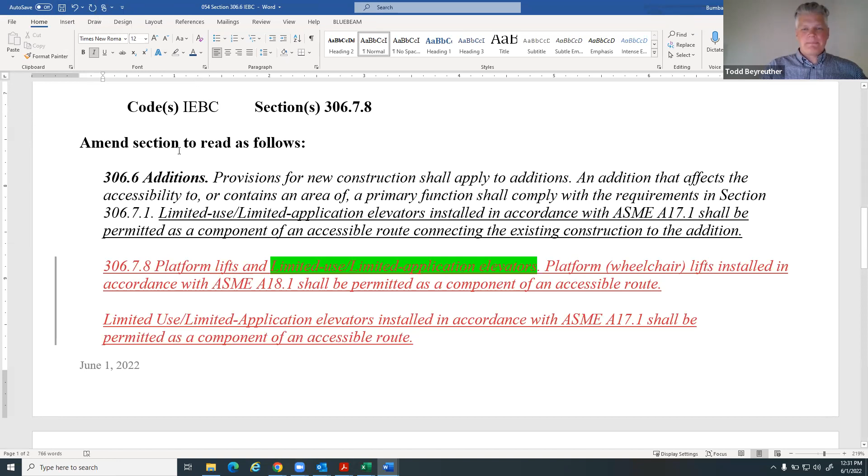Peter has his hand. I had a comment on this. I don't see any real problem with using LULAs versus platform lifts. The problem I have with these is whether or not they're truly user friendly. They're oftentimes under control of the establishment that's putting them in, and oftentimes they're non-functional or their keys are locked. Are these entities open and available for public use, or are they controlled by the entity that owns them?

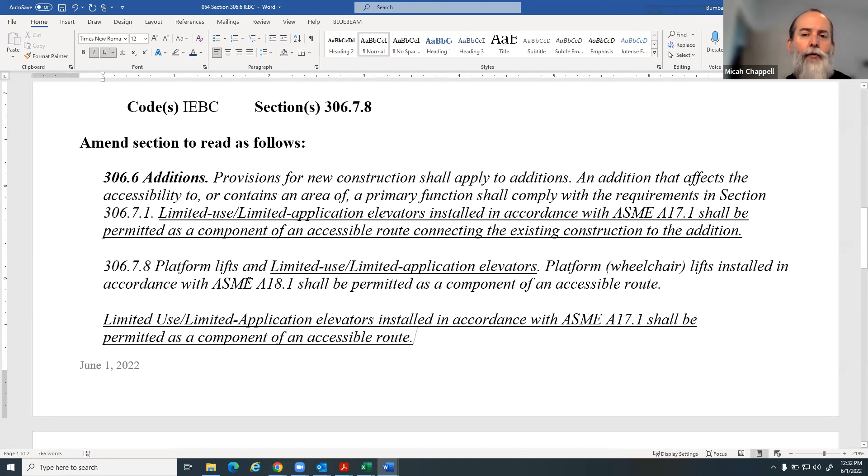It's a little bit off topic, I'm sorry. No, that's fine, I'll try to answer that for you. I'm not sure if these are more similar to an elevator than the platform lifts. I think the one you may be concerned with is a platform lift that has the keys, and I believe this is very similar to an elevator. I think their lifting height is only 25 or 30 feet, so they're different than the platform lift you may be talking about here.

And before we get too much further, I did want to indicate that we did have a change that needs to go on this. We did eliminate the connecting existing construction to the addition language. John, was that correct? In the first sentence, yeah. So Stoyan, if you could strike that. Which one? Connecting the existing construction to the addition, 306.7.1 — that's not supposed to be there.

Starting right there. Well, do you want to allow it for any addition? No, we want to strike that language. It's not needed. I respectfully disagree with that. Okay, great. Does that conflict with the first sentence then? You're changing the intent there. Well, it's up to you, but is it how you want it? That was how our original proposal should have gone in. Whether it's — I suppose if people want to debate putting it back in, that's fine too.

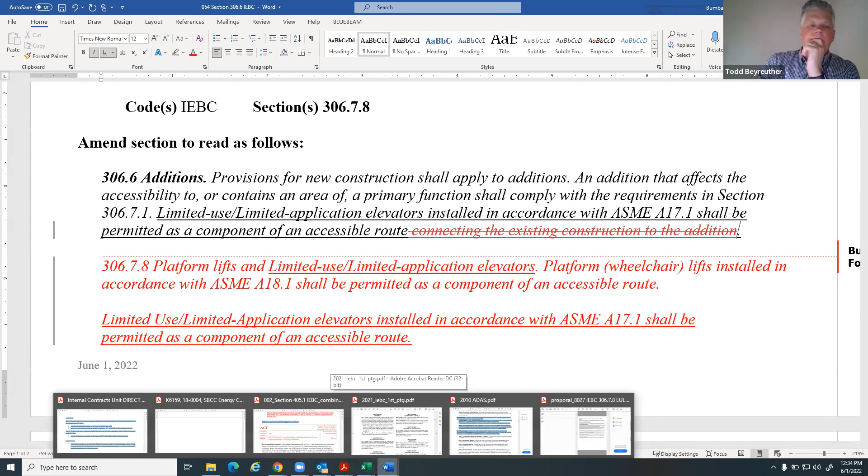And then Richard, did you have more to add to answer Peter's question? Yeah, go ahead Richard. I was just going to say that there are Lula requirements for controls and sizing in the ANSI standard, and typically the limitation is, as you said, the travel height — I think it's 25 feet max — and capacity is limited. Obviously if you required an ambulance stretcher to be put in this, that probably would not be possible.

I guess I'm not terribly concerned about the Lulas as much as the others. In fact, Lulas seem like a superior alternative to the other two — platform lifts and, what I forget the other one is. But at any rate, the problem with them is oftentimes they don't get maintained, the keys get lost, and they might as well not have been installed. I think 50% of the entities I use that fall into this category are not usable. But I would actually prefer to see a Lula used, because it implies a certain degree of protectability that the platform lifts don't have. I'm in favor of this amendment, but I just want to point out that background problem.

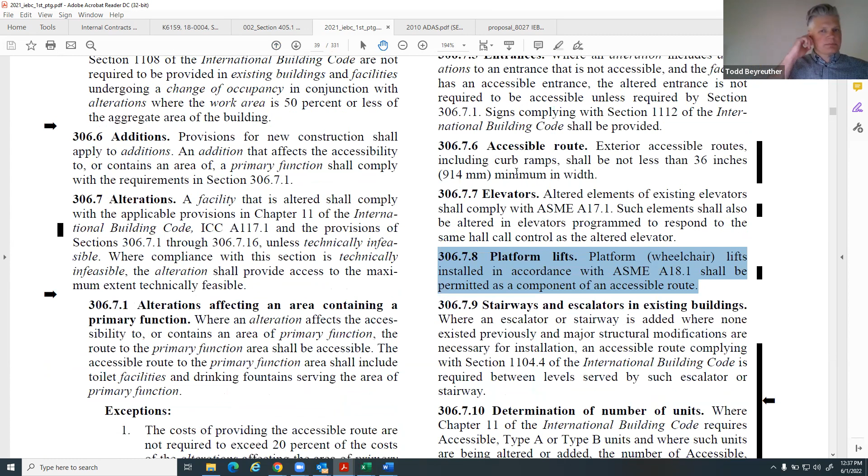Stoyan, would you mind flashing the 2021 base code one more time? I'm now remembering how this was renumbered. I had to get my grounding. I was curious what section — 306. There it is, okay. I'd forgotten that this was renumbered, right, from the 18? Doesn't matter, I just wanted to round everyone in. Yes, I think there is a renumbering. 306.7.8 is for alteration.

Okay, and Micah, if you can resend the proposal with a different rationale, because again you changed the intent. Yeah, we'll get that done. Michael, please — I do still have a question on the addition portion. Is the intent to allow all additions to utilize that? Because by striking that last part, I think it opens it up, especially being 306.7.8 is more specific than the general in 306.6, therefore would override it and allow limited use elevators in any addition without that clarifying statement. That was my concern as well. And based on the reason statement, second paragraph, I believe the intent is to get this into all additions.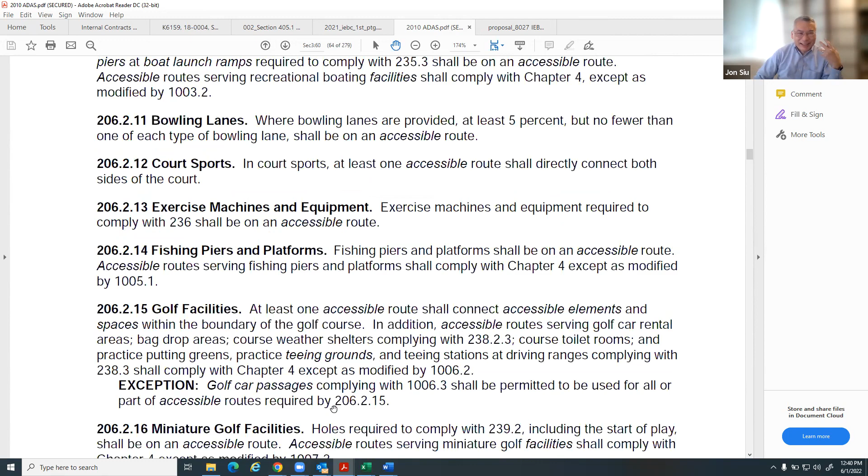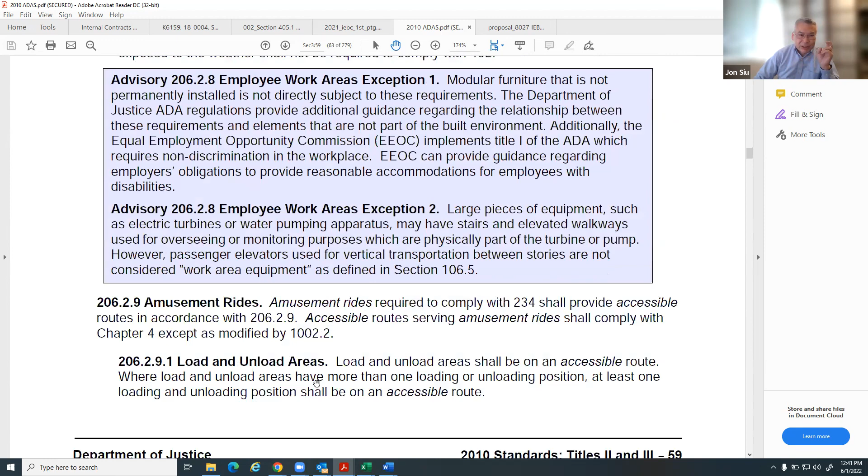Jon: So yeah, it's just you're triggering memories of testimonies at the ICC. We did get some testimony when we presented our change at ICC this last spring that a LULA is an elevator. We got that from the access board folks too, and part of why they were arguing a little bit against our proposal is they thought it was unnecessary. Since a LULA is an elevator, it would be allowed in new construction, which we were a little surprised at. But again, that's the testimony we received. Now, whether we all are going to read the code the same way, that's something else.

Because LULAs are regulated by A17.1 - that was their argument. They said it's already covered, we don't need to add this to the code. We think it's necessary as a clarification, but their argument was that it's an elevator, so obviously it's allowed.

So Jon, to that point - back to IEBC 307, does it belong with the elevators, not platform lifts? Because that's also referencing A... we're pointing it to that. Can you scroll down please to 306.7? Yeah, I mean that's a good question.

Depends if you agree with that statement that it is an elevator. I've personally never looked into it that way, but I think people have different views on that. Does it justify its own section? Don't want to make them renumber.

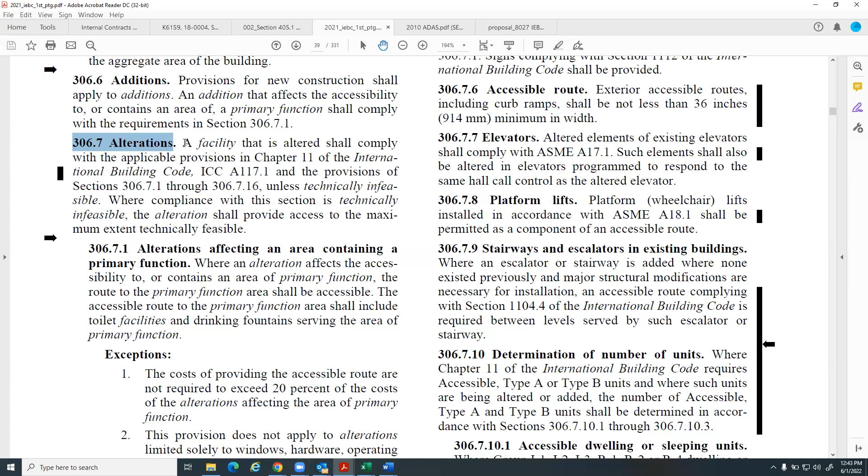If I can add something - Stoyan speaking. I was an accessibility consultant before I accepted this job here, so I think I know what I'm talking about sometimes. But LULA elevator is not a standard elevator, and a LULA elevator is approved, permitted for some construction, but not for all. And what you have in section 306, what was the 306.6?

306.6 - you're allowing LULA elevators on all accessible routes. And I think, I need to double check that, I think you're creating something that is less restrictive than how it is currently, including the 2010 ADA standards. That's the issue - again I can double check that. But the intent in IBC and the 2010 ADA standards was to allow the platform lifts and the LULA elevators for a specific application, not for everything.

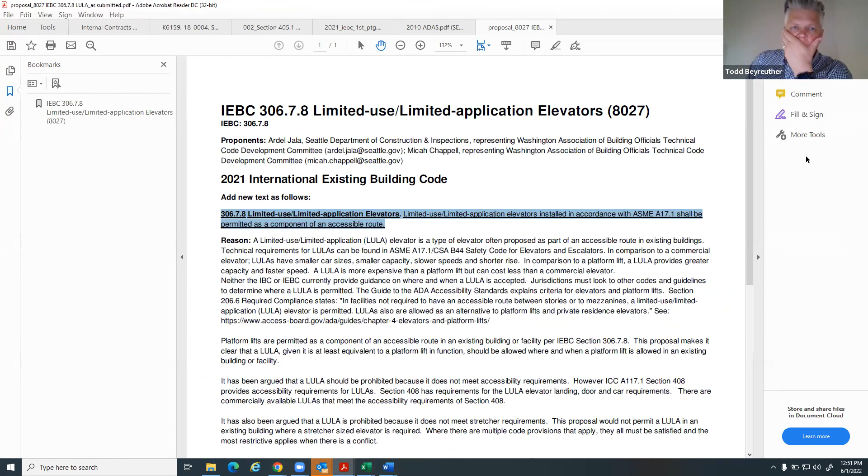Yeah, and there was debate about the addition part of it. Again, this proposal came from Seattle and WABO, and we revisited this and decided that at the state level we would like to try to do the additions as well. So that's where this additional portion has come in. But if the tag is not for that, maybe Jon can add a little bit. I get lost in a lot of our proposals sometimes. But if you'd like to add that language back for the addition part, that would still provide some clarification where it says you can put them in an addition, or use them as part of the accessible route to the addition from the existing. I think that would be good clarification for code officials on what would be allowed in those instances. So I'm not opposed to putting that language back, but this change to the alterations was approved without issue.

Yeah, Todd, to answer your question, this is purely for alterations, and the premise was that these are better than platform lifts, and platform lifts are allowed. So let's put these in and make sure it's clear for everybody that these can be used, because we've heard that some people in the elevator industry are saying these are not allowed by ADA, and we want to make sure it's very clear that they are allowed in these circumstances.

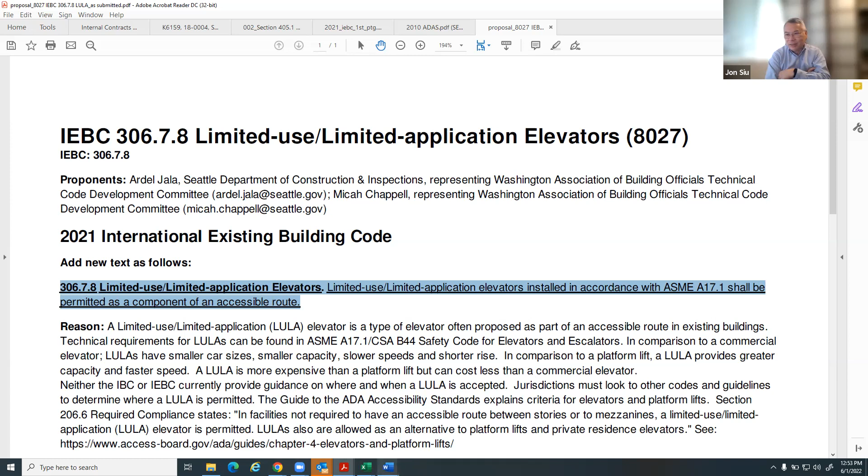Yep, and we figure the national folks can do that more easily than the state folks. Which is why I'm okay with what Stoyan was saying, let's stuff it into the existing 306.7.8, and that gets us to the same point. Then when the 2024 comes in, assuming it all goes through, it'll renumber everything afterwards, and we can eliminate the state amendment.

As far as the additions go, if this tag is okay with the proposal adding back the last part of that sentence, the connecting language, I think that would be preferable rather than eliminating it completely. Again, it will give some flexibility and guidance to the code official folks. So if the tag is willing to put it forward with the last part of that sentence reinstated, I would think that's better than nothing.

Agreed. Micah is using the formal Robert's Rules of Order thumbs up. I'm supportive of that as well. Michael, okay. Anyone else? Or was anyone opposed to that on the tag? Okay.

Well, are we there? Are we ready for a motion on this? Sure, I would make a motion that we approve it as modified. Thank you, Roger. And since I've been so vocal, I'll second it. Thank you, Michael. Okay, there's been a motion and a second to approve as modified. Any deliberation? Hearing none, all those in favor signify by saying aye. Aye. Aye. Aye. Any opposed, nay? Or any abstentions? Okay, so approved. Thank you.

There might be a little bit of discussion on the second one, the voluntary lateral. The engineers may want to have something to say about that. Well, we've got a couple minutes here, so can we tee these up a little bit? We'll spend a couple minutes here, and then maybe we'll continue and take action next week. But go ahead, I see you, Julius.

Yeah, this is Julius. I'm filling in for Natalie, who wrote this proposal for our technical code development committee. This proposal basically adds an exception to the voluntary seismic upgrade provision of the IEBC, under the prescriptive section 503.13 and the work area method section 805.4. The purpose is to give a code path that adds flexibility for the types of lateral force resisting systems that can be used on an existing building for voluntary seismic alteration.

Currently, item number 2 of the code language indicates that when you're adding new structural elements to an existing building, it shall comply with the IBC, which implies it needs to comply with the current ASCE 7 standard. ASCE 7 has some limitations on the type of system you could use depending on the seismicity of the site. For our state, generally in Washington we are under seismic category D, where the required lateral force resisting system is usually a special seismic force resisting system. So what this proposal does is allow you to use ordinary or intermediate systems that might be more compatible with the rigidity and ductility of the existing building.

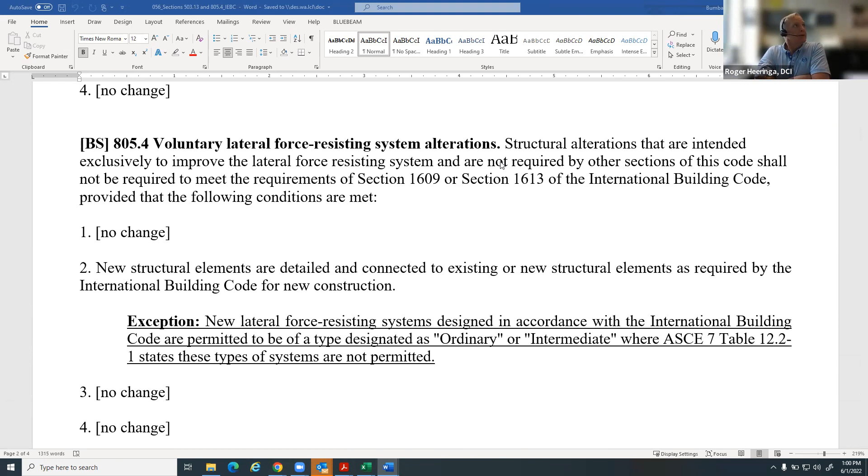My question would be, does it have to say something about all of the requirements of an ordinary or intermediate system, not just selecting it? I think there are some other considerations—when you do an ordinary system, is the welding different? I don't remember all the details, but is this enough to really give you direction to use the system? If you're voluntarily upgrading a system, adding an ordinary or intermediate frame is definitely improving the building, but from a code perspective, is just saying that you can use it enough? I would need to take a little bit of time to look through it.

I agree. So if everyone's okay with it, let's table this one. Go ahead, Julius and John, please—Julius first. Yeah, I'm okay tabling it.

I just want to add a note that we submitted the same proposal at the national level, and it was approved by the committee 10-2, although we are working on some tweaking of the language because there are some changes to this section by another group, ASCE, for the 2024 IEBC. This won't affect 2021, but for 2024 there are changes to this section that we're trying to tweak in this proposal. The intent is the same though: to be able to use ordinary or intermediate systems if you're doing a voluntary seismic upgrade, since the goal is just to improve the existing lateral force resisting system of the building.

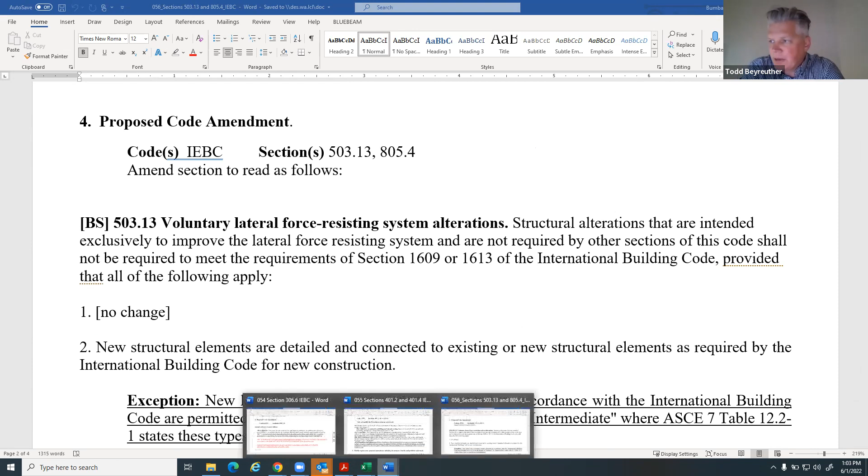Hi, this is Jennifer Gilliland. Can you guys hear me? Yep, welcome Jennifer. Okay, thank you.

We're just trying to accomplish a couple things to bring some clarity to the repair section of the existing buildings code in Chapter 4. We're making some changes in the scoping language. We're trying to accomplish two things. One is to make it clear that if you're doing work on damaged components and you need to do some work on non-damaged components that's necessary to repair what's already been damaged, that's not going to trigger the requirements for alterations, which can be pretty extreme to try to bring something up to code.

And then the second thing we're trying to do in 401.4 is just trying to give building officials something that will allow them to say, okay, this building has been effectively demolished by damage, or where the owner decides to demo and replace a building, that they have to meet the requirements for new construction. So my guess is that we may have some discussion about whether everything needs to come up to new construction standards, and also some discussion about what effectively demolished means.

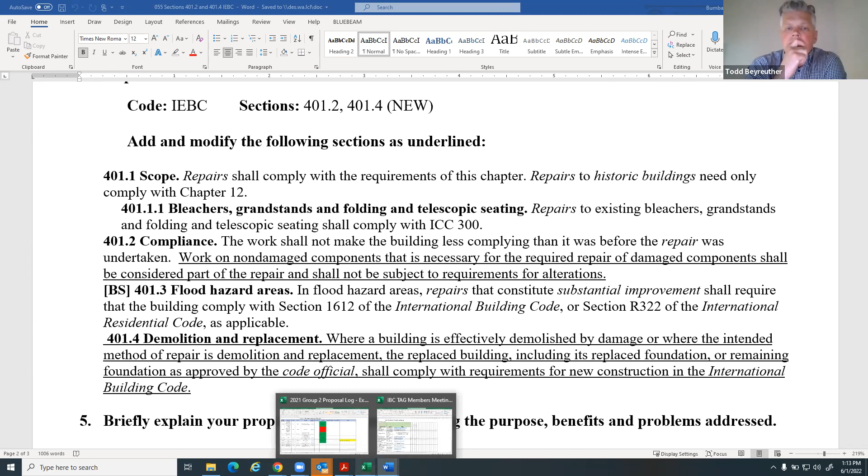This is Chris, I'm comfortable with it. I'll move to forward it to the BFP as submitted. Thank you. A second? I'll second it - I think that was Michael? Yes. Okay, thank you, so it's been moved and seconded. Is there any other deliberation on this?

Okay, hearing none, all those in favor signify by saying aye. Aye. Aye. Any opposed, nay? Any abstentions? Okay, great work everyone. Thank you - only came up one short, so I thank you, Jennifer.